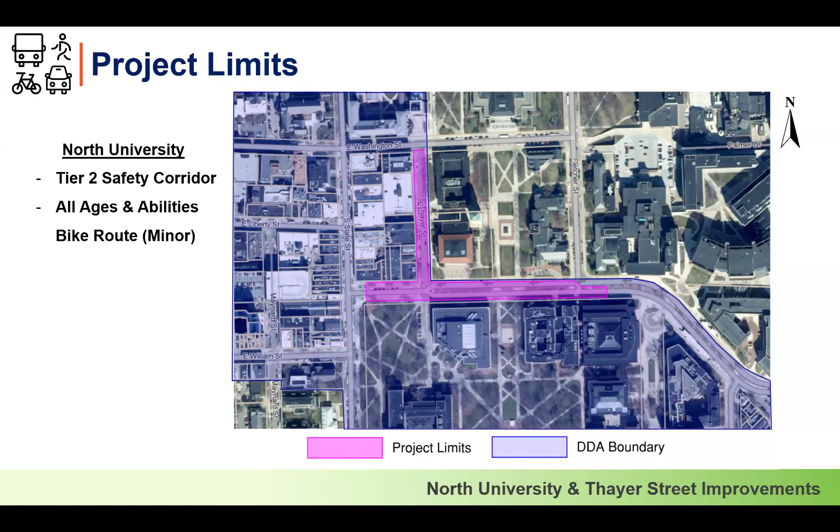Also included is Thayer Street from Washington Street south to North University. The bluish purple you see is the DDA boundary. For anyone part of the DDA and State Street Association district, this gives you a sense of what properties are involved, encompassing the project limits.

As far as project scope, one of the big things we're doing, similar to State Street, is replacing an aging water main. There are two of them—one owned by the University of Michigan, the other by the City of Ann Arbor—and those will be consolidated into one water main to reduce cost and bring things up to date for needs years into the future.

The city has also initiated storm infiltration systems. Instead of discharging water directly into sources like the Huron River, we use means and methods to recharge the aquifer into the ground, so sediments get filtered with a stone base rather than being discharged directly into the river. The goal is to reduce pollution.

Sanitary main work will be a lesser component, done a bit on Thayer Street—think from south of the Bell Tower Hotel to North University Street. There will also be associated sidewalk, curb, and gutter work to provide different features, which we'll get into. As you know, the pavement on both roadways is very tired and has exceeded its useful life, so that's part of this too.

And then on North University, the street lighting will be upgraded to enhance safety for all users along the corridor.

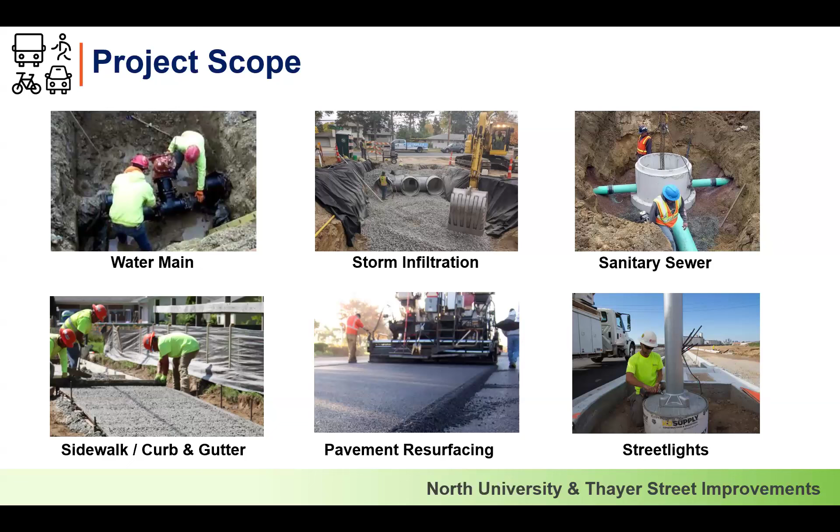Now specifically, when we get into the safety enhancements we're doing, you'll see some of these throughout the upcoming slides. On North University primarily, there will be protected bike lanes similar to what we're doing on State Street, giving cyclists their own space so they're not intermingling with traffic.

On North University, there will be an eastbound transit lane from State Street to just past Fletcher. It will primarily be used by the Ride and University of Michigan buses to maximize their usage time so they're not delayed, moving patrons from one stop to another in the most time-efficient way, reducing emissions and fuel costs.

There will be a raised crosswalk associated with the Ingalls Mall—more on that in a moment. We already touched upon the illumination.

There's also going to be what I'll call an enhanced bus stop. The bus stop already exists today across the street from Hill Auditorium for eastbound North University. You'll see some pictures of that in a moment.

Finally, there's a device you'll see in yellow called a trapezoidal delineator. It's relatively new and is used to separate sighted pedestrians walking on the sidewalk so they don't cross over into the bike lane. I'll show you some of those components in a moment.

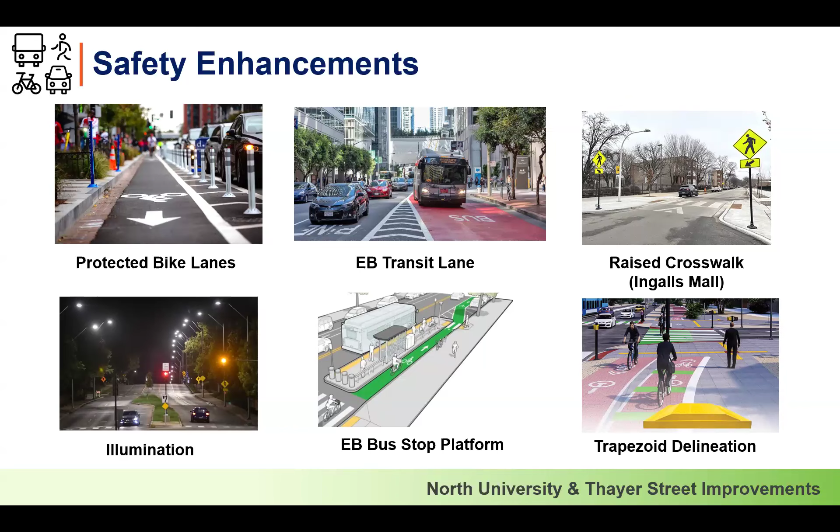So what do our construction plans look like? Let's get into some of those details. I've broken the slides into a plan view and what we call a typical cross section—a bird's eye view from the top, and then what it would look like from the ground. I've broken these up into segments because it's easier to articulate.

In order to facilitate all of these needs in this corridor, the bike lane is going to be going behind the existing back of curb that's there today. So the bike lane will be at the same elevation of the sidewalk, and so it will be above the street level. Crosswalks will be maintained on both sides at State Street and at Thayer, and the all-way stop control that exists today will remain in place after construction.

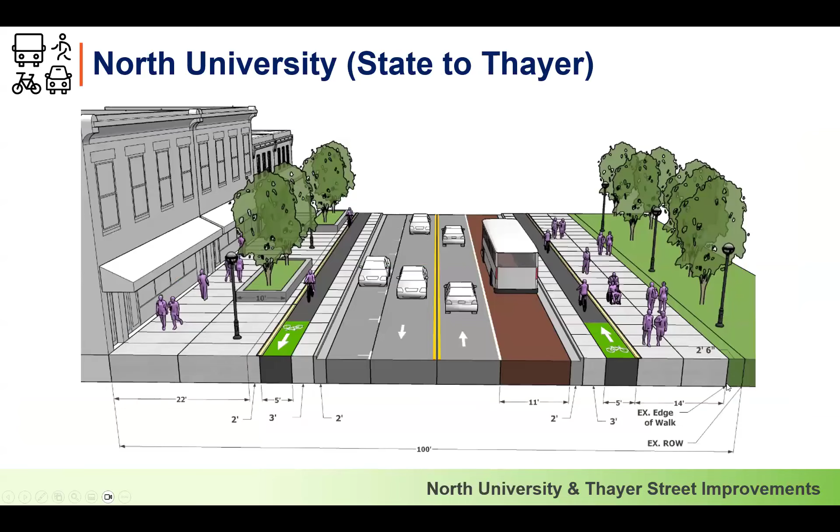So let me back up here for one moment. I'll toggle a couple screens so you can get the visual. As we went from State to Thayer, the bike lane was behind the back of curb. But once we get to Thayer Street, the bike lane is going to go into the roadway and be parallel to the curb, so it'll be at street level. That will continue for the remainder of the project as we go east towards Fletcher, with the one exception of going behind the bus stop. More on that in a moment, because I have a visual that'll help explain that.

The area in blue is on the north side; that's where Hill Auditorium is. There was a request from Hill Auditorium and the university to provide storage space—loading and unloading is a more accurate term—for buses to drop off students and adults at large to performances or any type of event at Hill Auditorium, and likewise pick them back up, providing a space separate from the bike lane. This area can accommodate up to three charter buses, and the bike lane proposed in the roadway will merge over to the south, or to the left, so that it doesn't conflict with people loading and unloading from the bus area into Hill Auditorium.

In order to make this work and put all these features in, the median that exists today, which is give or take 20 feet, is going to have to be narrowed so that we can maintain a regular travel lane for cars going eastbound and westbound, which you see here in gray. So the surface area you see today will be reduced significantly, but by and large the curb lines that are there today will remain as they are. We're not expanding outwards; we're just using space internal to the road project to meet the needs and provide all the amenities being requested from our stakeholders.

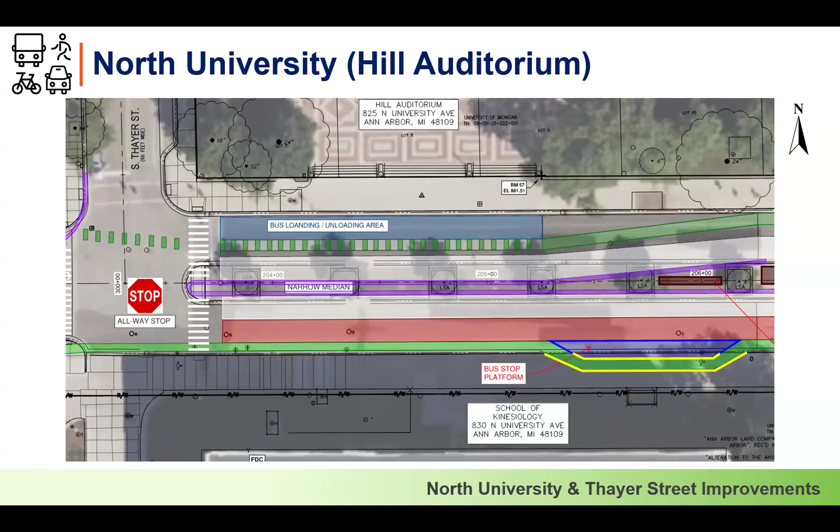So I'm going to show you 2 different cross sections. This one is directly across from Hill Auditorium. On the left is Hill Auditorium, with blue loading and unloading for the buses. The intent is that they're not to park there long term, just to drop off, take off, and come back when they need to pick people up.

Then you have a separated bike lane protected from cars. There will be delineator tubes, not shown here, separating the bicycle from the car in this ladder-shaped pavement marking area, or buffer zone. The boulevard at large today is about 20 feet wide, and it's substantially being reduced, as you can see here, to 5 feet.

You have your bus lane going eastbound, and the bike lane also going eastbound, separated. This bus lane will also have delineation devices along it so that it separates non-transit users from parking in that space or using it to get ahead of someone else on the street. So this will only be specific to users in the transit industry.

This next slide here, we could focus on the right side. You can see the bus platform I was talking about. The bus would come up to the platform, stop, drop people off or pick people up to get onto the bus, and then the pedestrian would cross the bike lane.

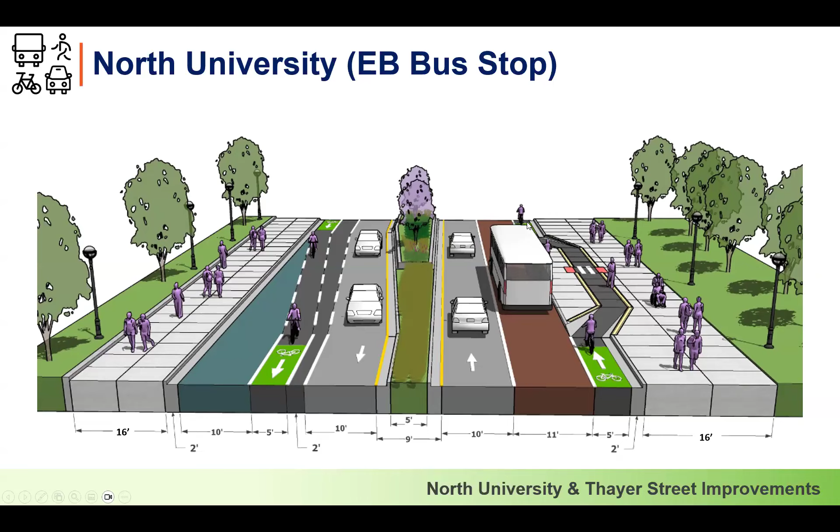Likewise, the driver doesn't have to focus on 2 different conflict points of crossing in short distance. Everything's being consolidated into one spot, so that in and of itself should enhance safety.

In order to get pedestrians to follow the new, what we'll call desired line, to go from one side of the mall to the other, we are constructing planter boxes similar in height to what exists there today, so that it requires and achieves the desired effect of the pedestrian crossing at the specific marking, rather than continuing to follow old crossings that exist east and west of that new spot.

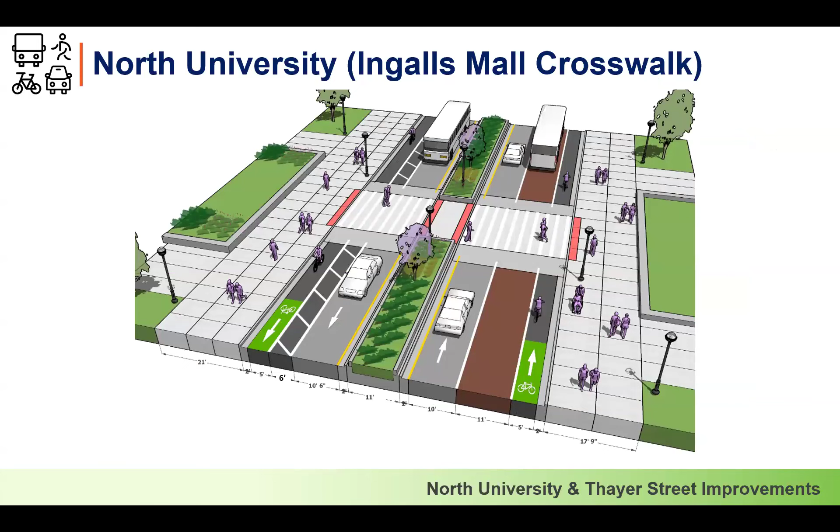So I'm going to show you a couple different visuals here for the crossing itself. So you have Ingalls Mall. Burton Tower, if you're familiar with that, is a little bit over here onto the left, Michigan League over there.

So you have your two walkways on each side of the pedestrian mall. They're going to have a desire line that goes into the center as part of the consolidation. You can see the new planter boxes that are going to be installed here, constructed here.

And likewise, same thing on the south side where you walk down to chemistry on one end and kinesiology on the lower end. That helps give you some sort of bearing there as they continue to walk towards the Hatcher Library as they go to the south.

You can see the red is the bus lane that will be separated with tube devices from the eastbound car lane. Likewise, the westbound lane will be shared by both buses and cars.

Because primarily the transit people start utilizing Fletcher Street to go to the north, they don't continue to go westbound towards State Street or Thayer. So there was not a specific need to provide a specific designated transit lane for their use as they're going westbound. I'll show you a different slide here.

So this kind of gives you more of a focal point of what the look and feel will be like. There will be enhanced street lighting that will be there to light up the crossing at night so that pedestrians can be seen while they're crossing, to again enhance the safety of it.

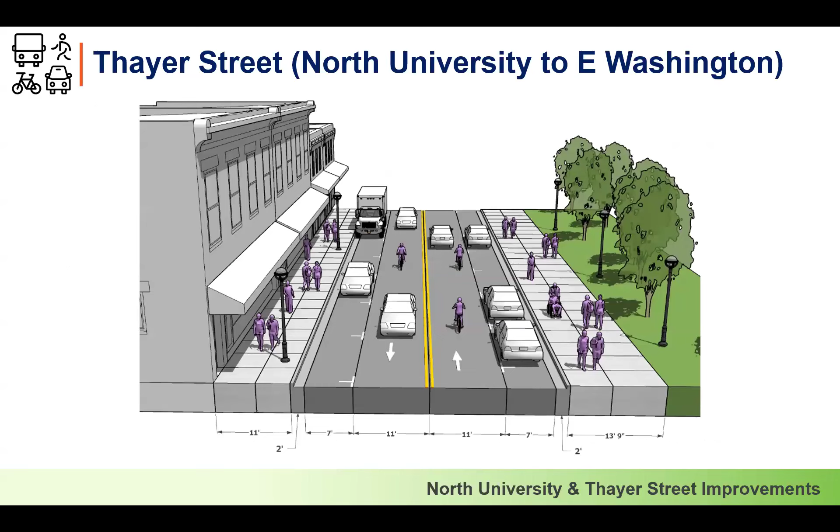There's going to be some isolated sidewalk and curb repairs done on this roadway, but by and large, it's going to be far less than what's going to occur on North University in order to achieve the cross section that I've shown you for the bike lanes and for the bus lane.

So as you can see here, this is the west side of Thayer Street. You have the Bell Tower Hotel on the left. You have the parking structure and you have the Humanities building, from memory, the Jerky Pit, I believe that's what it's called, Caribbean Jerky Pit. So that's on the left side of the street.

You'll have parking on both sides, as you can see, and then you have the shared use lanes where cars and cyclists will share the use, and then pedestrians on both sides of the sidewalk.

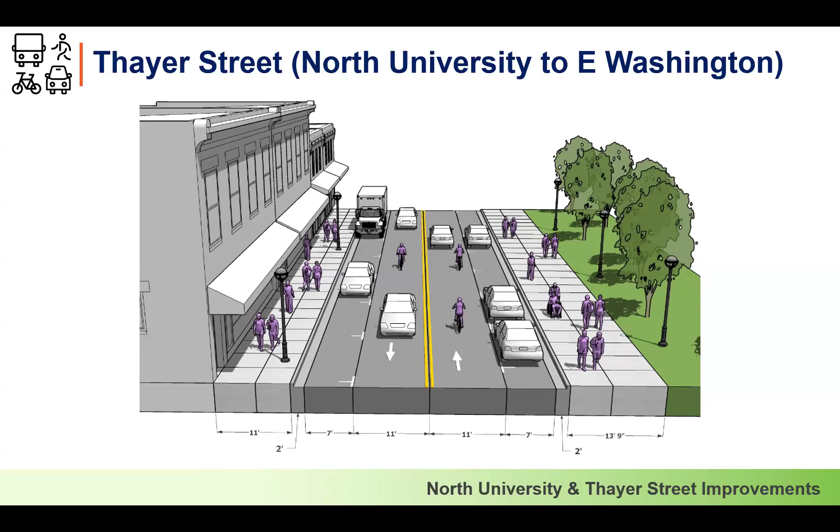Okay, so we're going to transition here into project timeline, detours, and access points.

So tonight we're here with our public information meeting on November 3rd. The bid opening is projected to happen on February 17th of 2026. The construction start time is going to be on May 4th, to accommodate needs for the university for commencement that is going to occur in the area, specifically at Hill Auditorium.

The project is similar to State Street. It's going to pause for the art fair, which is a crown jewel of the city. We're going to need to vacate the area both from a standpoint of materials and operations so that the street is entirely back to a condition for the art fair to use for the entire week.

So phase one will be broken into May 4th to July 10th, and that will focus primarily on the water main work associated with it and the Fletcher Street intersection, so that that intersection can be fully open to traffic during phase two, so that buses can operate during the fall semester to the transit center using Fletcher and North University east of Fletcher, the intersection.

So phase two will resume on July 20th, similar to what we did on State Street. We're projecting that work to go up to November 13th, which would be the open-to-traffic projected date, weather permitting. Sometimes we are delayed a week, like we are on State Street right now, but pretty good timing-wise for a project this size and nature.

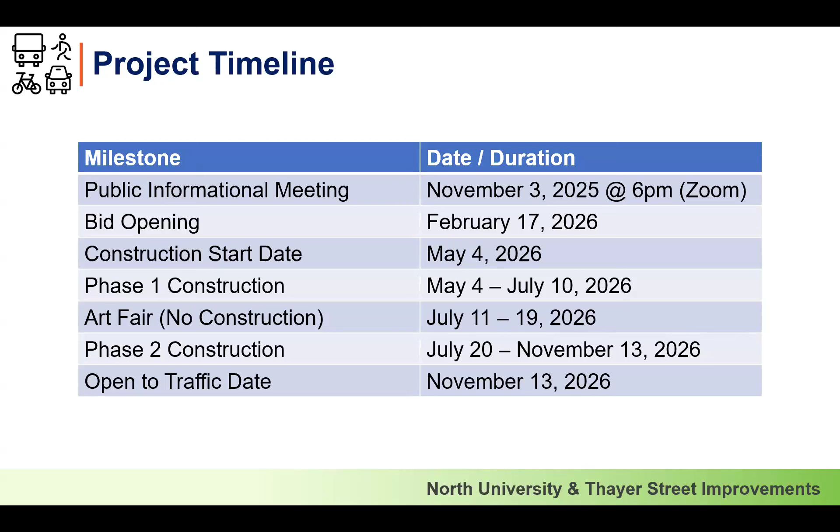Okay, so how do you get from point A to point B? Point A being one side of the project and point B being the other side, specifically on North University. So Thayer Street in and of itself, we have to maintain access to the parking structure, to the Bell Tower Hotel, safety as far as getting to utilizing the fire needs in the Ingalls Mall, and then there's a couple residents, an apartment complex, and a resident on the west side of the street.

All of that is going to primarily be maintained through the East Washington Street intersection, so those people will be maintained in that direction. North University, we're dealing with separately. They'll have access in specific cases on both ends, but the roadway will be closed to through traffic. So the general public is not going to be allowed to travel on North University from State Street to Fletcher and vice versa. The purple dashed line is the detour route that's proposed now.

It is long, it is lengthy. Unfortunately, that's because there are a multitude of other projects occurring around downtown Ann Arbor next year, some private development, others city projects. So phase one, again, would be from May 4th to the art fair.

And just so I wasn't clear, I didn't really say this - I gotta see here. So we have State Street south to Hill Street, and then Hill Street will utilize Forest to Washtenaw back to North University.

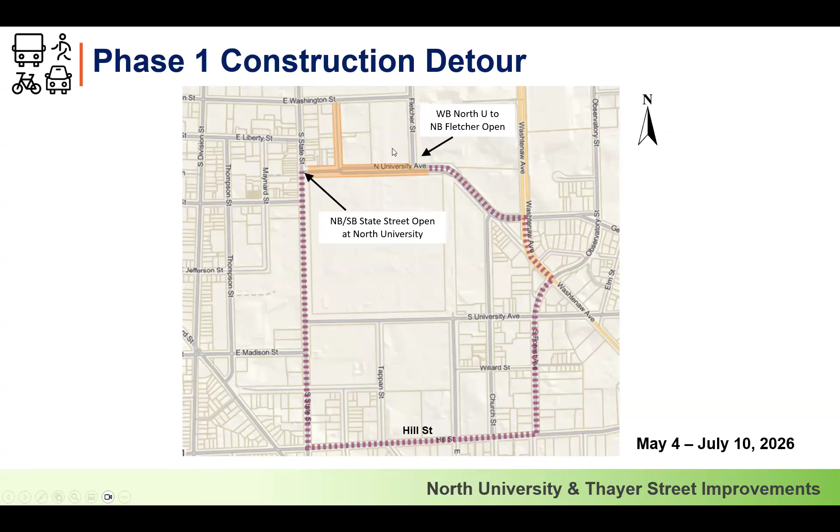One caveat here: the westbound direction of North University will be open for right turns to go northbound on Fletcher during phase one. That's what that note means - westbound North University to northbound Fletcher open during phase one. The northbound/southbound State Street will be open at North University for people that have to make deliveries to the campus area and other miscellaneous items along the way, like the League and Burton Tower and whatnot.

Phase two is going to be a lot easier, and the reason why is we're going to utilize a very simplistic detour route: Fletcher, East Washington to State Street. Ideally, it would be wonderful to utilize this during phase one. However, the other crown jewel of the city is Summerfest, and they utilize East Washington Street for essentially the month of June from Thayer to Fletcher.

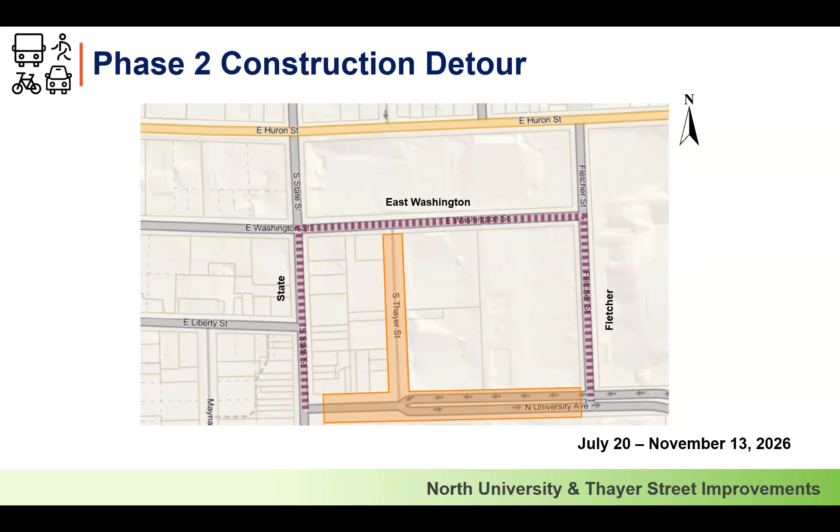So that's why during phase one, we needed to go all the way down to Hill Street in order to detour traffic. But during phase two, which is the week after the art fair through November 13th, things will be much simpler to be able to get around and navigate around the project limits.

So in a nutshell, primarily anyone that has business on Thayer Street, their point of access will come from one of two ways: either from East Washington Street to the north, or State Street and North University to the west. The reason I say one or the other is because it's completely dependent upon the operations happening from week to week.

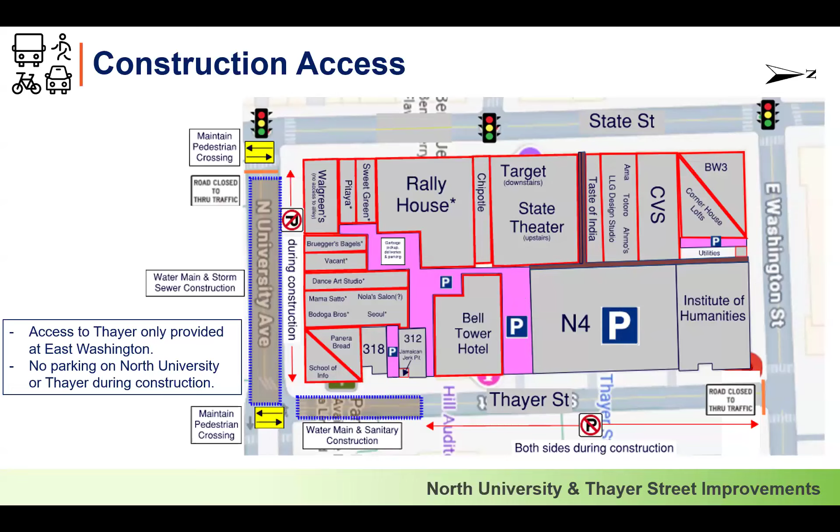So parking will be restricted—no parking in the construction zone. But there will be access to the parking facility for Bell Tower via one way or the other, and likewise the N4 structure that is used both by people who work at the university and also for things like the art fair and the summer festival.

Okay, that was a lot of information. I'm sure you guys have a lot of questions to ask. I'm here to answer them as best as I can. I'm going to pass things back to Jasmine and hear what your questions are and see what we could do.

So, first question is from Bud. He says, very helpful and clear slides. Thank you. I understand North University planters on the north side of the street will be untouched. Will the sidewalk from the planters to the buildings also be untouched? Mostly—and why do I say mostly?

So there are going to be, from memory, four different water service leads going from the new water main in the roadway to the building. Throughout the summertime, we're going to need to coordinate how that tie-over happens so that water service goes from the old main to the new main. Other than that, that's the only reason there won't be sidewalk access, for a very short duration. During that time, we would detour pedestrians appropriately so they can get from one side to the other.

Okay, next question from Alex. Will there be a crossing light at the new Ingalls Mall combined crossing, similar to the one further east on North University at the CCTC? Yes, I'm familiar with that crossing. No, there will not be a traffic signal associated there. It will be marked as it is today—you'll have the pavement markings and the signage, but there'll be no features beyond that, like an RRFB or a traffic signal.

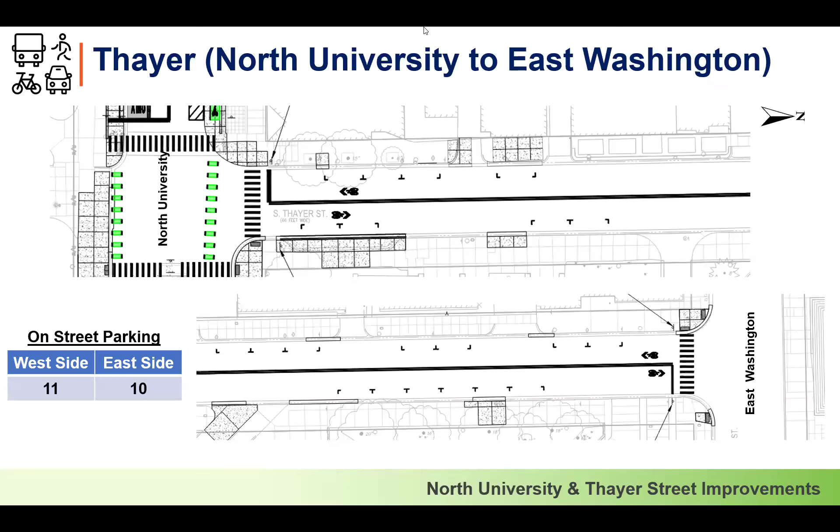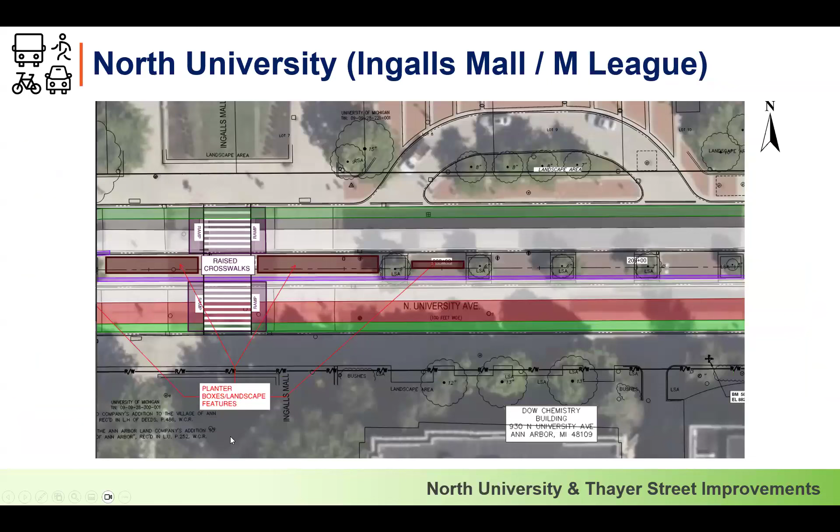I don't have a good one to show you from the entire project, but there will be access provided on one side of Thayer Street or the other, so people will be able to get from here to there. Likewise, at Ingalls Mall, this will be maintained throughout construction. And then the crossing at Fletcher Street will also be provided during construction.

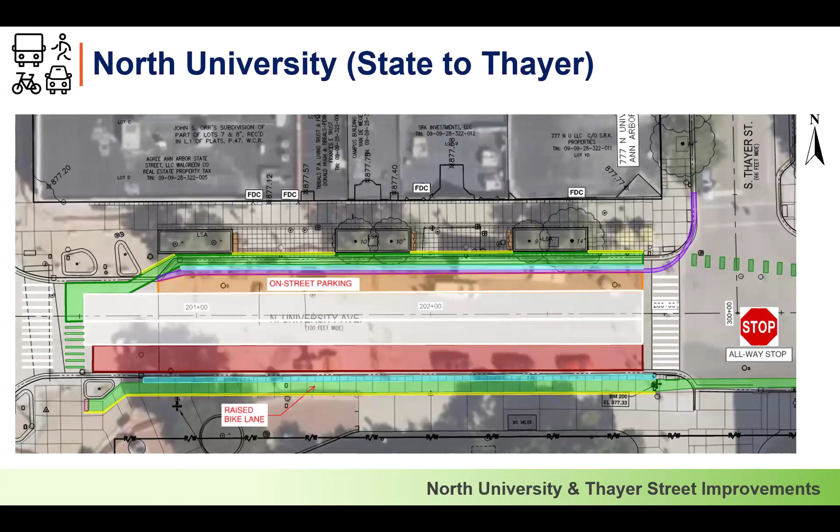Now, if you're talking about east-west movement, there will be times where sidewalks will have to be out of commission while we're constructing them. At those points, there would be some type of detour route in place to get from the east side to the west side. They may have to cross the street, but both sides will not be closed simultaneously where neither side is available to them.

Okay. Question from Mike, owner of the building that Bruegger's Bagels is in: What about supply delivery as of now? The alley behind the stores is blocked most times by employees of some of the stores. Where can trucks park to deliver supplies?

Likely State Street is my best guess for that. Maybe on a good day on Thayer Street, but we will not have the space, unfortunately, on North University in front of your store with the water main activities and the storm sewer activities for a truck to park right out front and make those deliveries.

I was going under the assumption that the deliveries were occurring through the alley because you have a door back there. But if there's more for me to know about, feel free to reach out to me and we can discuss those and see what we can accommodate.

Oh, Bud did a follow-up about the bridge. He was saying bridges allow walking the full block on the north side, east to west. And he said, thank you, you answered my question.

Somebody asked if these slides will be available publicly. I'll answer that question. We plan to upload the slides tomorrow, and the recording of this presentation will probably be up by Thursday or Friday. We have to do some editing and trim the video and get it uploaded, so that will take a day or two, but the slides will definitely be up tomorrow. So that is the answer for that one.